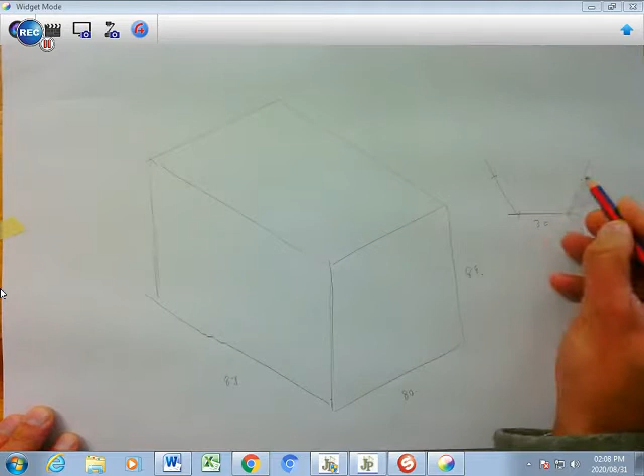Then you were asked to draw an auxiliary view here. So that is 30 here, 60-degree angle, 30, 30. So you bring that in at 30 again. So there is your auxiliary view there, and then you box that for me again, like that.

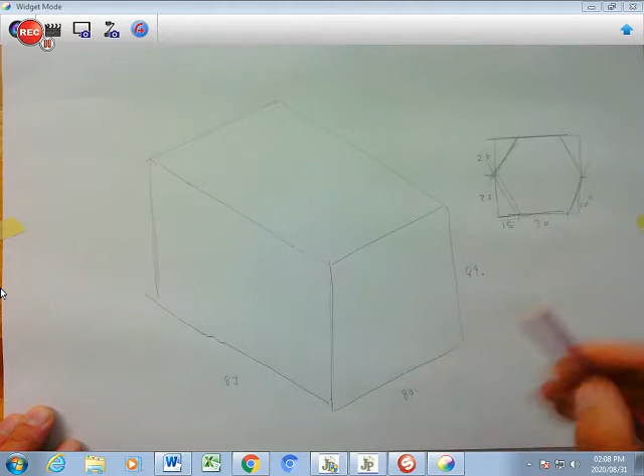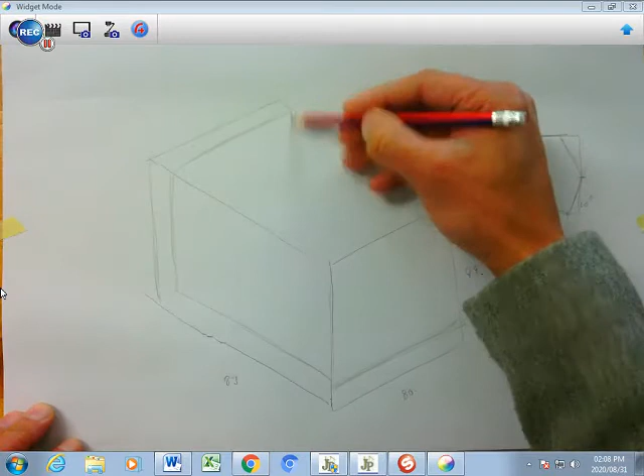Okay, so this dimension here is going to be 15. That is going to be 25 here, and that's going to be 25 if I'm not mistaken. Okay, and then you are going to have this platform of 12 here, and it goes right down this way, 12, and it goes up on this side. So you just need to calculate what the distances would be here. Some mathematics would be involved there, and then that would be where you are going to get your platform and your backing. So I'm going to remove that just to assist you a little bit more.

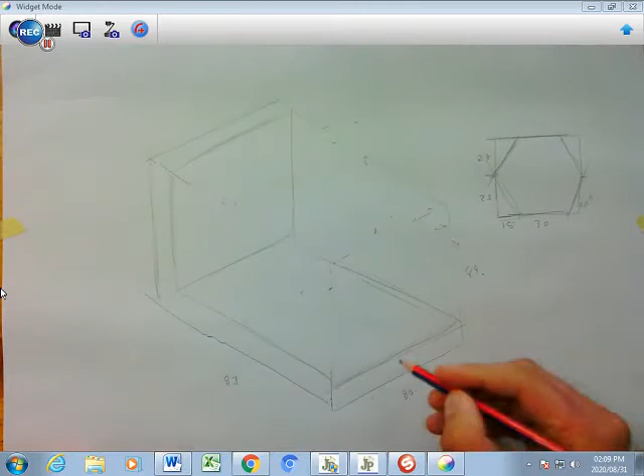So here we have that. I'm going to take that away for the moment. Okay, and now on that we're going to put this in here. So that's 15 here, 30, 15, that all together gives you 60. This whole thing is 80, so 10 and 10.

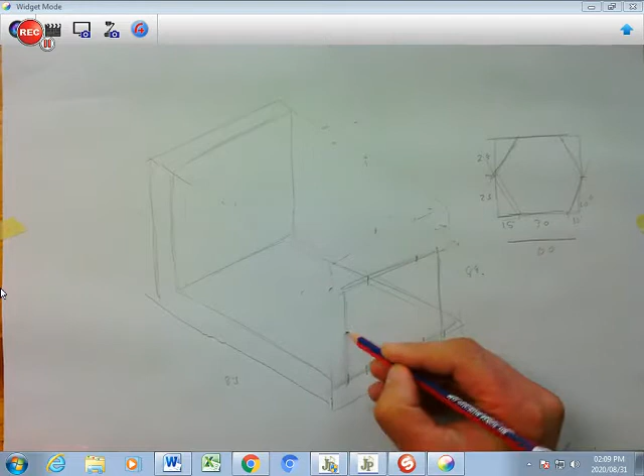So you're going to create that box here. It goes up by 50 if I'm not mistaken. And I'm going to put that in there. And then you import it, 15 here, 15 there, 15 there, and these markers here, that in there. You need to check this for me. I'm not too sure whether that is going to be 25 because I'm just sketching it roughly for you.

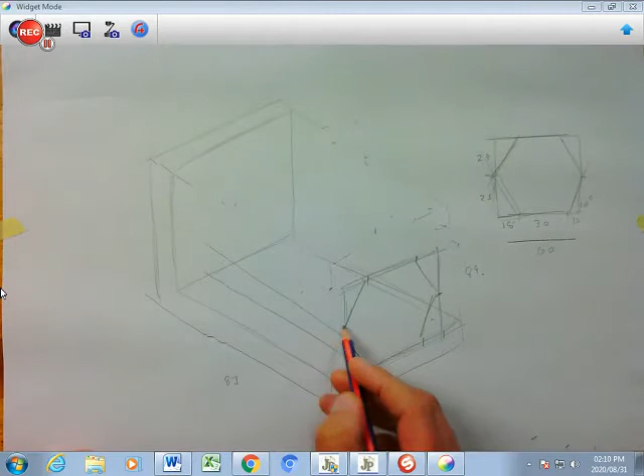Then I'm going to take this across here till there, take that across there. This has the same angle. This distance from here to here is 70, 75. So if you measure 75, you're going to have that. Sorry, it's slightly more slanted. It is parallel to that there. So you're going to have that. Then this is going to be 75 as well.

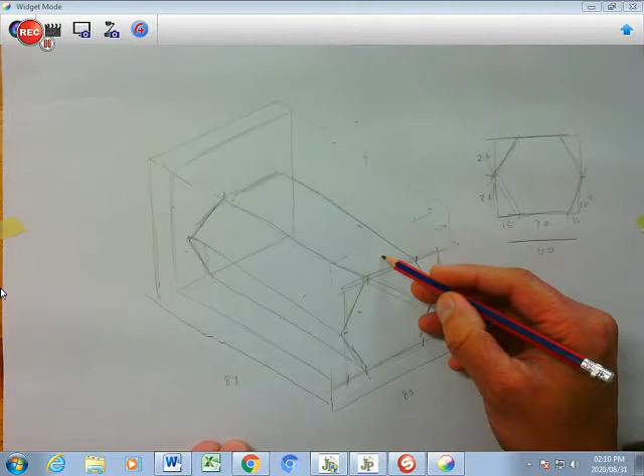That comes across. That's your normal 30 degrees like that there. Okay, on top here there's a box here of 36 to the back and 15. So your 15 up like that. There's your 15 and 36 back. So you're going to draw that box like that there. There's your box. I'm going to take that away slightly so that you can see clearly what your box is all about.

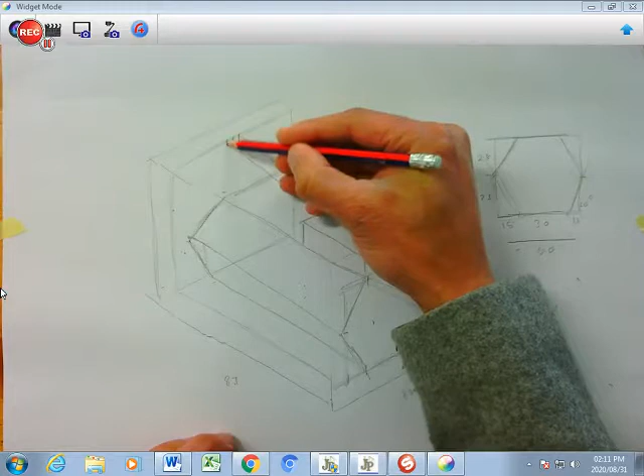Then in the middle here there is a web which is halfway here, and then it's 8 millimeters, 4 and 4, and it links up with this here, so halfway there, 4 and 4, and then you directly link those two. It slightly slants from here, and it slants till there. And then automatically there's a corner that's going to form that runs right here, which is going to meet up, which we can't see there.

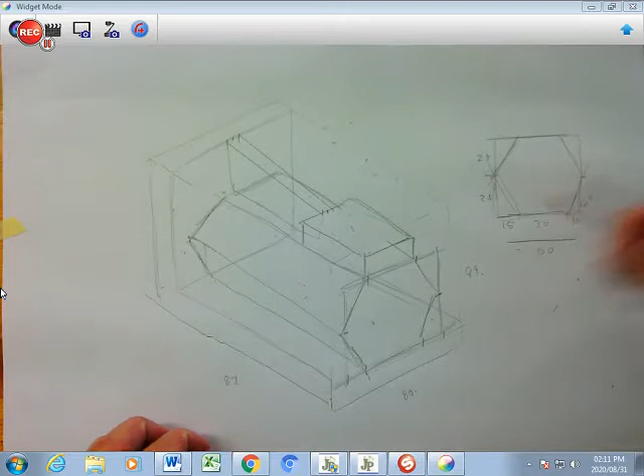Okay, and then you have a side part here, which you need to fit in here. You need to get the dimensions of 24. You know, so it goes up. It goes up 12 and 12. So you go up 12 here and 12 down, and you take it slightly in until here. Sorry, not like that, like that. And then you bring it across here so that you can see where it's going to be fitted in, which is 18 and 30. So that is going to be fitting in there, which is 18 and 30.

Here you're going to have this halfway and that halfway, and you're going to create this box which you can get from the dimension you see here of 24 square. So that is basically what you need to draw at first. Okay, there's obviously going to be a corner here that goes in because that is a hole that goes inside there. And then inside this box here, you're going to have the center, which is halfway of your 36.

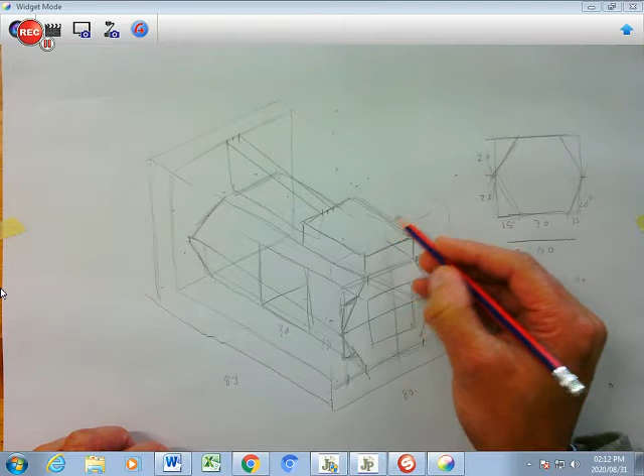So 36 there, and then halfway this, which is halfway of the 30, and you have that. Your circle is 24, so you're going to have 12 here, 12 there, 12 that side, 12 that side. So you're going to draw your box.

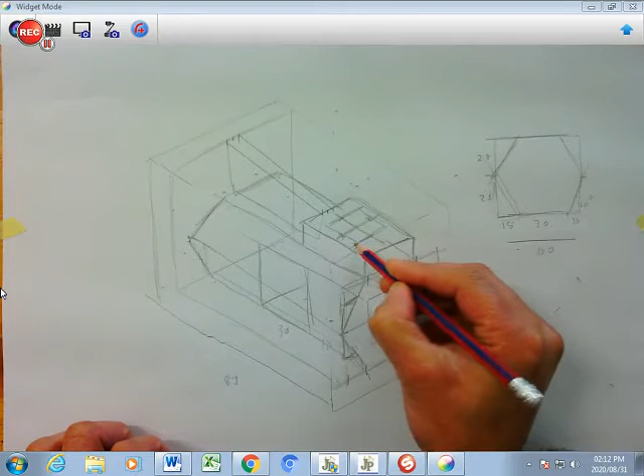You have two acute angles, which are going to connect, and a V part for your obtuse ones. So the obtuse ones would be there for that, this one for that angle there, so you're going

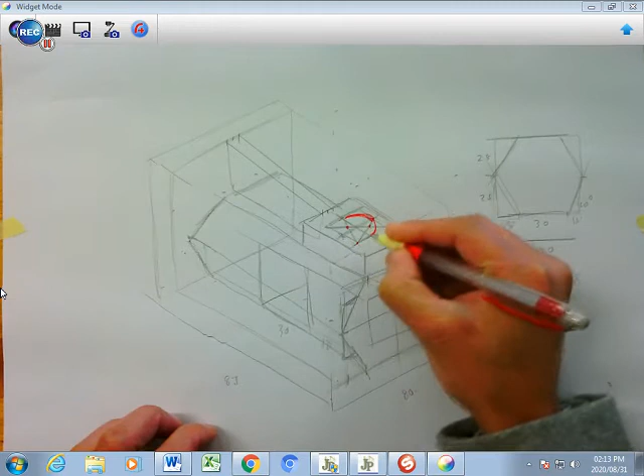to put that in there because you need it, and you're going to use this one here for that there. You don't need this because you're going to cut it. Okay, so now you've got that. You're going to cut this in half here.

Remember, this also slants here down, right? It goes down by the same amount that it goes that way. So you're going to put that in there. And then you're going to go halfway here because you're cutting it perfectly in half.

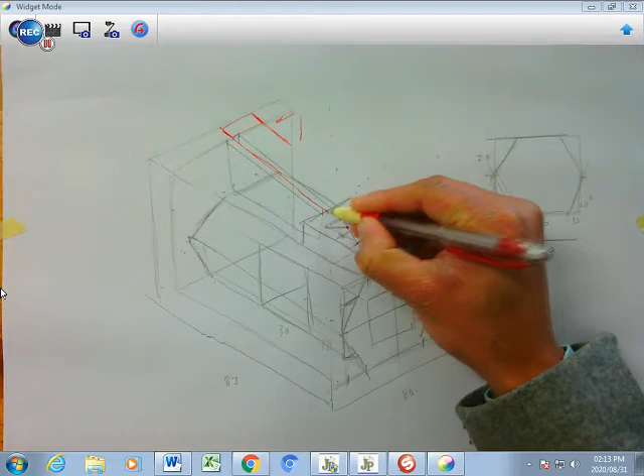And then you're going to come across. It's going to go right around. That's A. It's going to come down here. So when you cut it there, and of course here you're going to cut through A, and you're going to go this side. So this part is basically removed, so that part comes out.

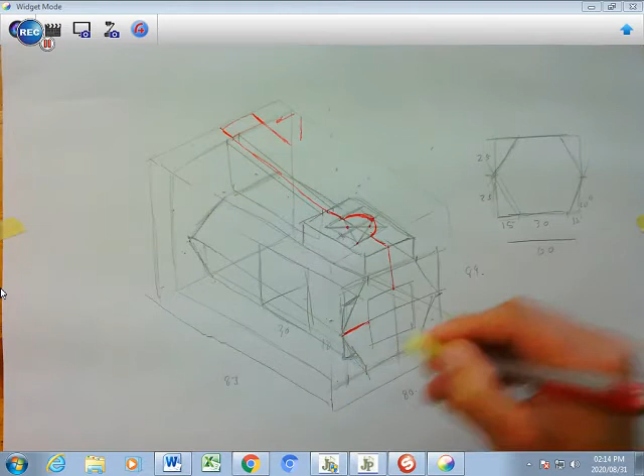And then you run it like that. It goes across here, comes out here at 30 degrees and goes right across here at 30 degrees.

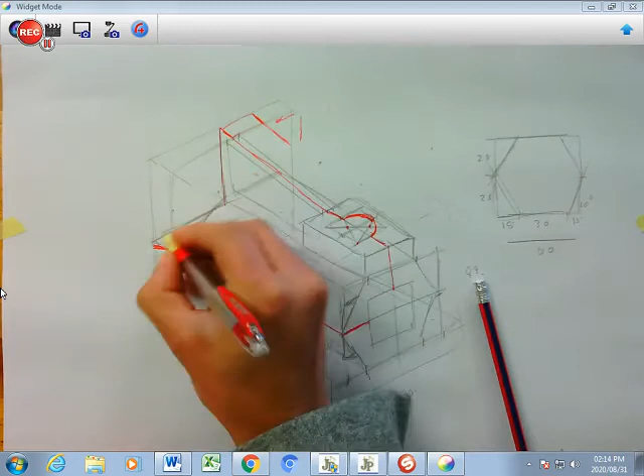So now you can actually ensure that this here is going to link up like that there, and you're going to find that part linking up there with that over there. Okay, so there we meet, point meet over there.

And then you're going to find that this corner is going to be running in line with that there. It's going to meet up there with that corner over there. Okay, so that is going to be completely open. That's going to meet up with that corner over there.

This is going to come down, this is going to come down like this. Okay, in the same line, and it's going to go in, and it's going to hook up with a corner that you are going to see here coming down.

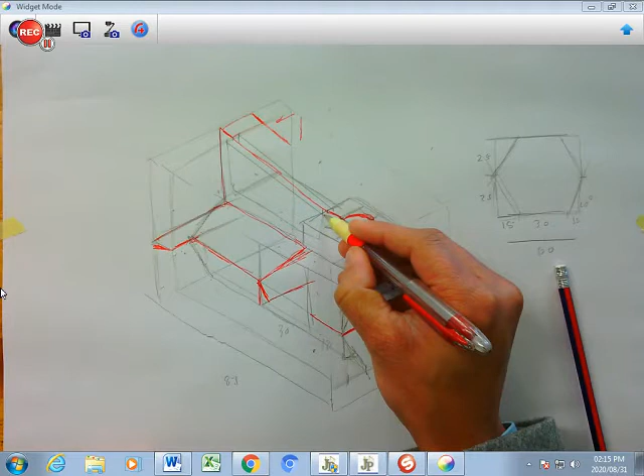So there's a corner that's going to be coming down here, and that is going to go inside there, which I will get to now.

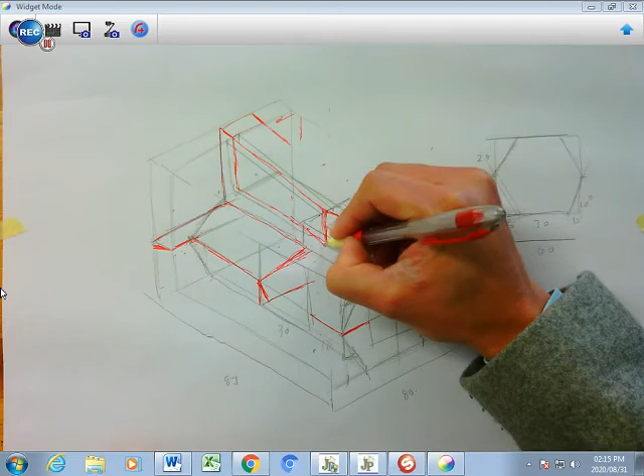So this is going to be your web, right? It's going to run like that there, and it's going to go up until this corner that you see there. Okay, there we go. And then you're going to see this corner coming down here, and that corner is going

to be running in the same line with that there, and then it's going to come down like that. So you just need to find the inside there.

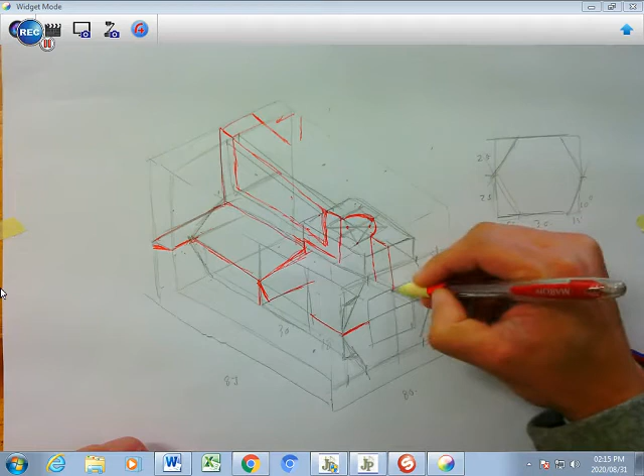This is going to come down, and it's going to meet up with that there, and this is going to be coming in, and it's going to hook up with that there. So that is also going to be sectioned.

Then there's a corner that's going to formulate here from the front. It's going to link up with that corner over there. Okay, which you need to find, and then this goes underneath.

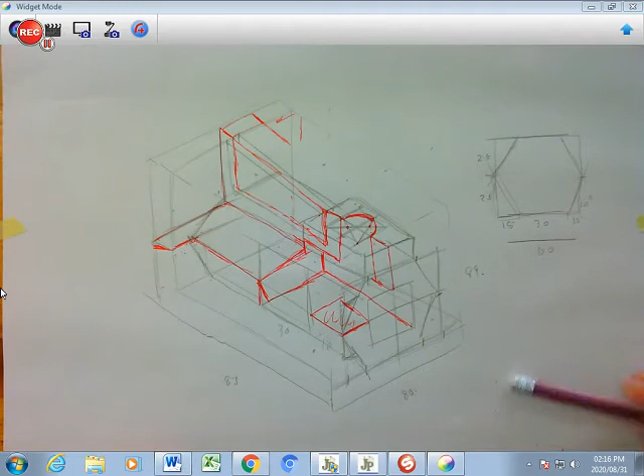Okay. And then the rest of it you just have to fill in, coming down like that, up, that way, linking up here, and that coming down, which you can't see there eventually. And then this comes down, that goes that way, this comes that way up, that comes down.

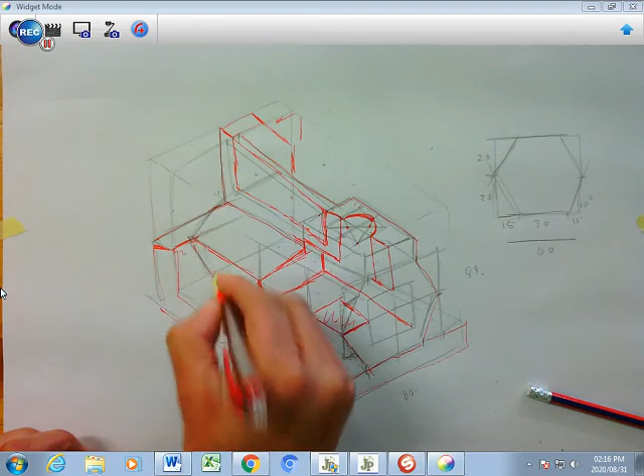These are all just features that you need to darken. Okay, your hatching sections is going to be that there. That's going to be hatched as well till there. That's not hatched, this is hatched. That's going to be hatched, and that's going to be hatched inside that space over there.

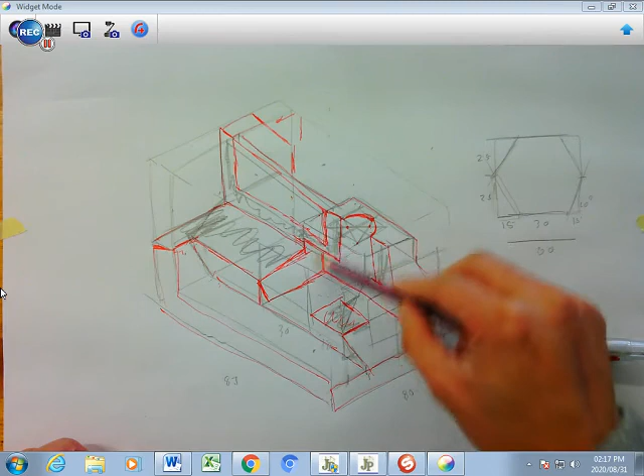Okay, here you just need to figure out the corners here are going to line up with one another for you to be able to figure out this area over here. This corner here, this is also going to be darkened till there and up.

These corners are going to line up. You will see, you will find them. And that corner here is another corner that forms here. Sorry, that is the corner already that forms there, that corner there.